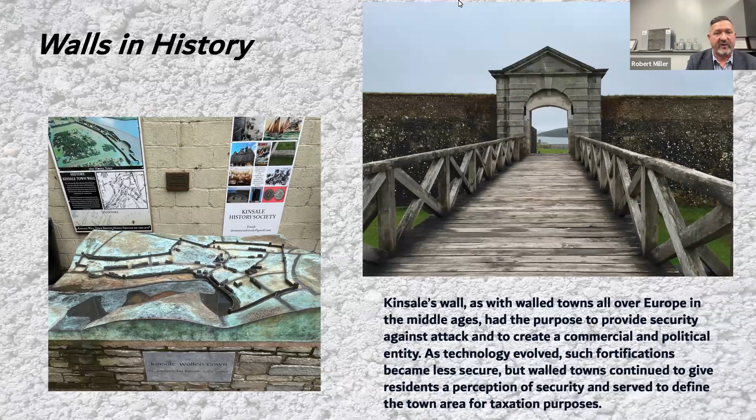Historically speaking, there are whole cities in Europe surrounded by walls. From a historical perspective, we use these products not only for the demarcation of that city, but as fortification, as protection, as all sorts of different things—demarcation of where you should start and stop as far as where the property is at. So walls are absolutely important when it comes to your project site.

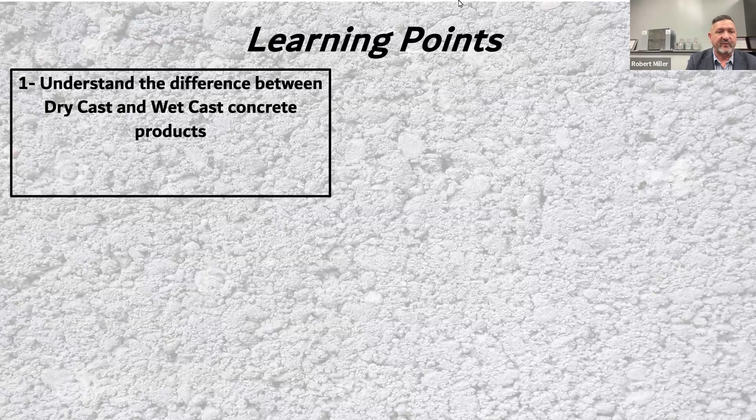Our learning points today: we're going to understand what walls are made of. Most concrete walls are either wet cast or dry cast systems. We'll discuss the differences, so you have an understanding. The particular wall that DURA-Crete manufactures is a dry cast product, and we'll go over the benefits, features, and what the product can do for you on your project site. Next, we'll talk about how a wall serves various layers of security on your project site.

Certainly the most obvious is it's a visual barrier. It's private, but it also has some sound attenuation, as well as resistance to climbing. It can serve higher levels of security, like ballistics or vehicle crash ratings on your project site, if necessary. So a wall, even though it's a single simple line demarking your perimeter, can serve a lot of different layers of your needs on those project sites.

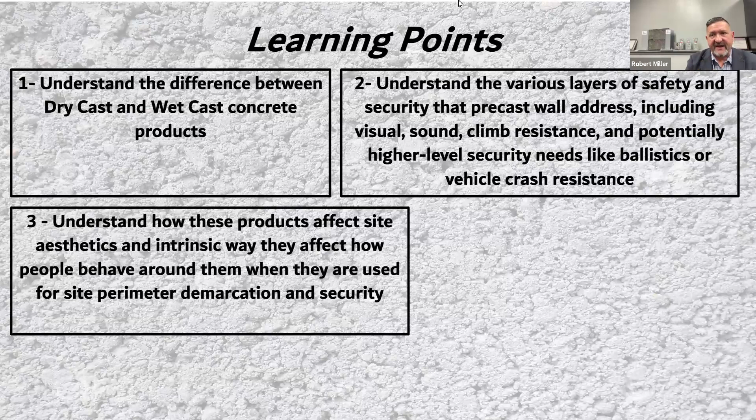Next, we're going to talk about how these products are aesthetically valuable to you—how they intrinsically help make the site look a little bit nicer, perhaps, but more importantly, how people are going to behave around them. A lot of study has been done with perimeter demarcation, and walls certainly fall into that category. We'll talk about some of the psychological effects of utilizing these products when you're putting them in place on your project site.

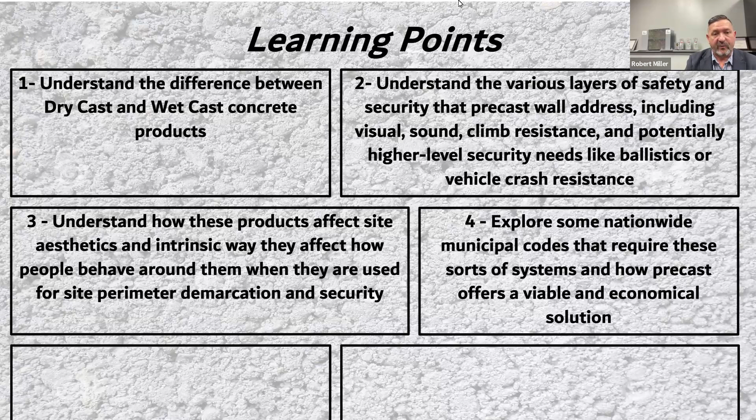And then finally, we're going to talk about some of the codes. More often than not, you'll find that these products are actually required for getting your C of O, for getting the permitting moving forward, especially if you're backing up to a residential area—putting in a commercial property that's backing up to a residential facility. You've got to make sure you have that demarcation in place, and these walls are often specified or required as part of those codes. We're going to review some of the national codes available in today's marketplace.

But starting at the very beginning, we're going to understand the difference between wet cast and dry cast concrete products. When we talk about concrete and cement, we have the tendency to use them together, but please understand that cement and concrete are not the same. Cement would be equivalent to flour if you're making bread, and concrete would be the bread. Cement is only a portion of the chemistry we put together with water, aggregates, and other things to produce the concrete.

How we get to that end result involves a lot of different chemical solutions we could put together. Just like different kinds of bread are available, there are different kinds of concrete where I could change the water level, add more cement, add more Portland, put in more gravel, use different types of gravel, use pea stone—all sorts of different things that make that end result concrete different depending on how I put all of those items together into that recipe, if you will. So all concrete is a combination of those different items to produce the end result of that concrete product.

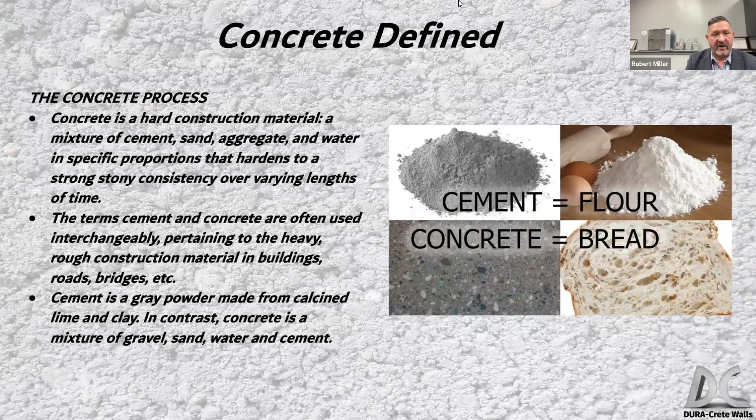When we talk about concrete, most of the time we think of it in terms of a wet cast system. Those of you who have ever done a driveway at your home, or put in a pad or whatnot, are familiar with wet cast concrete. That's when you take a pre-mixed solution of Portland cement, sand, and gravel, add water to it, it starts that chemical reaction, you mix it up, and it turns into a slurry, if you will.

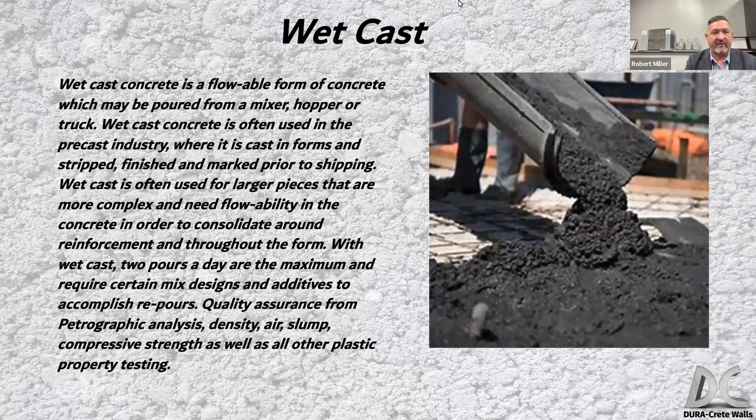You pour that slurry down, then you have to smooth it out, put it into forms, etc. Wet cast is certainly very popular for a lot of applications - building roadways, driveways, foundation systems, all sorts of things - because of its versatility. But in the wall world, it's a little bit more challenging.

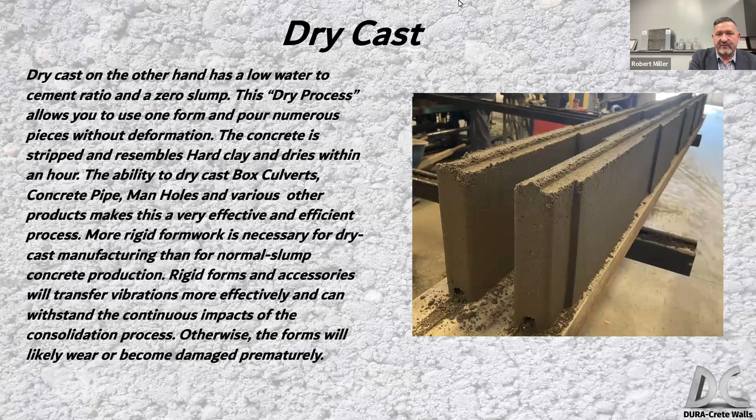If you've ever been to the beach as a young person, you've made a sandcastle. You know that if you put too much water in the bucket with the sand and dump it over, it's going to slurry right out of there. But if you put just the right amount of water in that bucket and turn it over, allowing the water to come out, and pull the bucket off, you have a nice form that is made. This is pretty much what's happening with a dry cast system, but instead of the bucket, we're using a form, and vibratory compaction to get all the bubbles out of it. Now I have the ability to produce a plank of a dry cast wall system that I could utilize on my project sites for a lot of different needs.

The key benefits of dry casting: first and foremost, better production. I am able to produce this at a very high rate of speed as far as a manufacturing process, producing those planks one after another, very consistently. That brings us to the second point, which is zero slump.

When we pull that form off of there, you're familiar with concrete, how it flows into those areas with a lot of moisture inside. Because it's dry cast, there is zero slump. So when that mold is stripped, it maintains its shape pretty much 100%, which is where the term zero slump comes from.

Once we get that done, it's now going into the oven to be cured. Through that curing process, we have minimal shrinkage. As we're producing this in the factory, I am pretty well assured that every single slat that comes off that manufacturing facility is going to be consistently manufactured. It has very little tolerance from one slat to the other when it's all finished and put onto your project site. So that minimal shrinkage allows us to manufacture very quickly, but also have a very consistent product when it's actually installed onto the project site.

Next, we have no air entrainment. Because of that vibratory compaction, any bubbles that might be inside the product are removed - they're compacted right out of it. One of the biggest challenges with poured-in-place walls especially is you have large masses of bubbles that might occur, and that will cause early degradation when it's exposed to the elements, water gets in there, et cetera. So with no air entrainment, it's a much more dense mix that allows us a very solid product when it's all said and done.

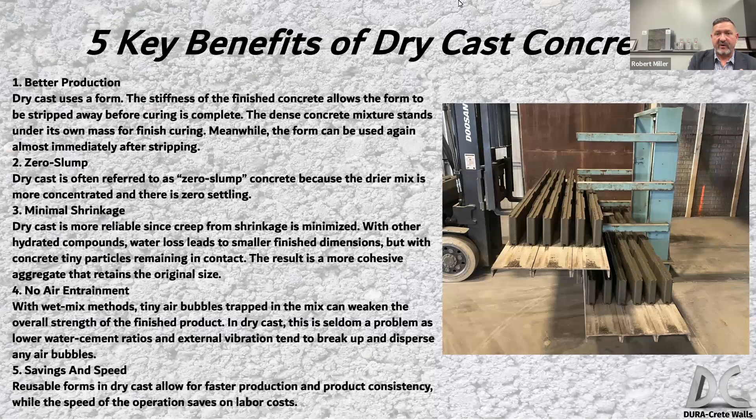And most importantly, savings and speed. We can produce this very, very quickly, so the product can come off the line without affecting your project site so much, which brings us to the last benefit: your construction footprint.

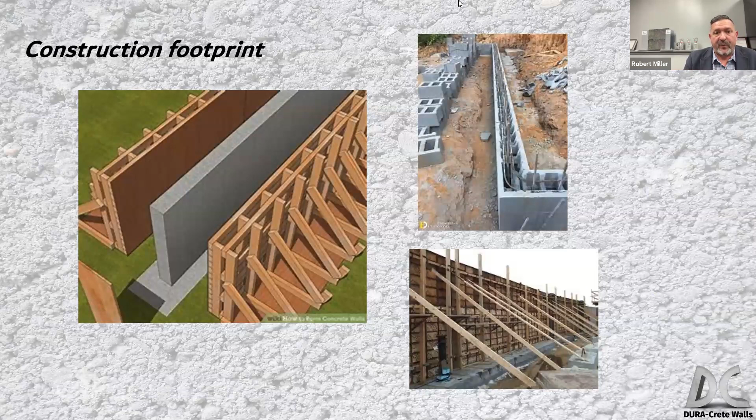Traditional walls - when you're putting in a poured-in-place concrete wall at the back of your facility - require a significant amount of formwork and shoring and all sorts of things that have to happen with the foundation that needs to be poured. It is quite a massive footprint on your project site. Even if you're doing block wall, you have to dig out that foundation, put the foundation in place - it's a continuous foundation - then put the block in place, and it becomes a pretty big task, and more importantly, pretty invasive on your project site.

So that gives you some idea of the values of why we would go with the precast system. The other value not listed here is replaceability. If you put in place a cast-in-place wall and somebody hits it, which inevitably will probably happen, with the precast system all I have to do is go to the manufacturing facility, make a few more planks, take your broken planks out, and put new ones in. At worst case scenario, you may have to pull and replace one of the posts that got struck, which again is a lesser impact on your site as opposed to taking down a whole section of brick, block, or poured-in-place wall and remanufacturing it on site, which is extremely impacting. So there's a lot of value in precast, especially for site demarcation walls.

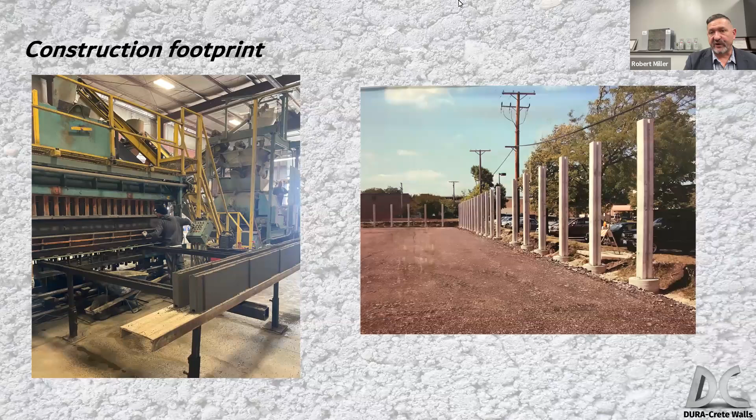One of the things DURA-Crete is doing as well, moving forward to make it more versatile and easier to repair, is having modular post installations with a textured steel post instead of a concrete post. So even if the post does get hit, now it's just a matter of pulling up 4 bolts rather than pulling up a whole foundation. So they're really on the progressive end of developing the product to be as user-friendly as possible.

Does that answer your question? Yes sir, absolutely. Moving on.

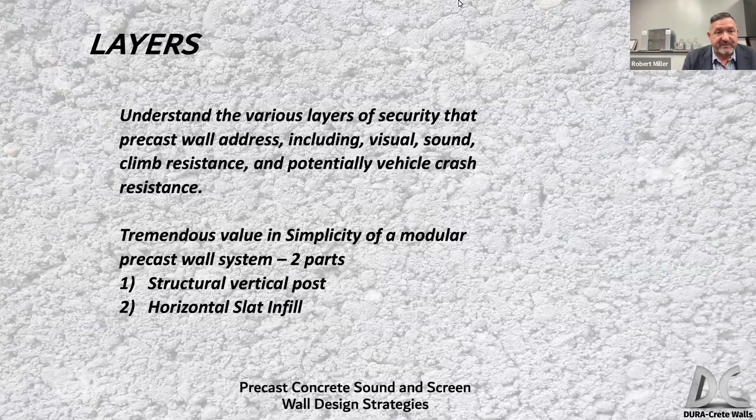The layers of security - when we think of a wall, from a basic perspective, it's supposed to be a visual barrier, that's why we're putting it in place. I don't want to see on the other side, so we're putting in this visual barrier. But it also serves a lot of other layers of security with this very simple system. When you look at it, it's really just a post and a slat, but it could actually do a lot more than just be a sightline demarcation. Again, on the most basic form, it's a visual barrier - I'm putting this product in place because I don't want you to see what's on the other side.

They have contracts right now with a lot of distribution centers. The distribution center does not want you to see the activities of their trucks inside their facility. So they're putting up a screen wall in part because of the visual barrier qualities it provides on my project site. It keeps it visual security, if you will.

The other is sound barriers, noise mitigation. These products are used often between residential neighborhoods and roadways. Those of you in the Fort Wayne area on this call know exactly where that site is at. I believe it's Illinois and Coliseum, don't quote me on that, but you've driven by it if you live in Fort Wayne. You know where that wall is at, and that wall's intention is to be a noise mitigation barrier.

When we talk about noise mitigation when it comes to walls, there are two different aspects. There's absorption, where the wall actually absorbs the sound waves and deadens them so they don't pass through the wall in a certain fashion. And then there's reflective sound waves, where the wall will reflect some of those waves back or deaden them as the diffraction angle occurs, depending on the height of the wall, so the person on the other side can't hear it.

When we're talking about noise mitigation and sound barriers, I give a whole presentation just on this topic to give you some perspective of how it works. If I put up a wall that has a 40 decibel level of noise mitigation, what that means is if I have a noise that's 80 decibels, it's going to deaden it by 40 decibels, which to the average person is like a quiet conversation, somebody talking where you can barely hear them.

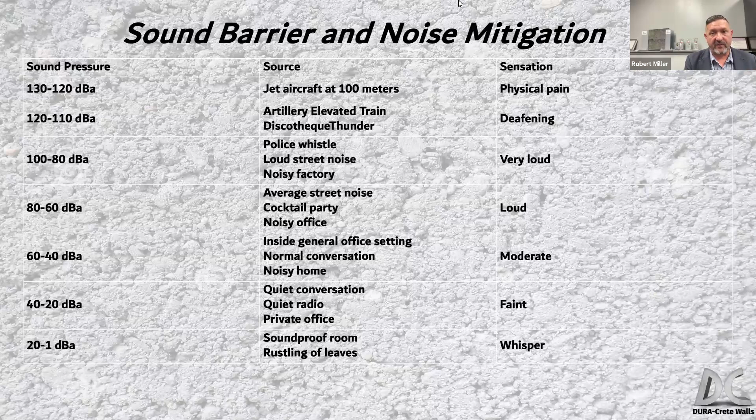Next, again, inherently, concrete is ballistics rated. If you shoot it with a projectile, it will stop that bullet. When we talk about ballistics ratings, it's a topic today that we don't like to talk about necessarily, because we're thinking about ballistics now at schools and offices and places we never thought we'd have to worry about ballistics. There's a lot of different ballistics ratings out there. Most of them are going to be about glazing perhaps, or about body armor, and you don't want to confuse them.

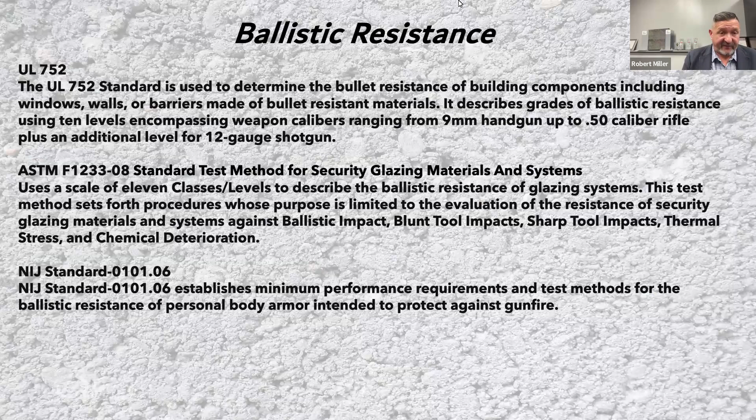When we're talking about building components, the ballistics rating you want to be cognizant of and aware of is UL 752. That is my favorite ballistics rating because it is the most cut and dry one. When we talk about body armor and things like that, there's a lot of variables involved with distance and caliber and whatnot. With ballistics ratings here, it's pretty black and white when it comes to a product.

We're basically going to say that based on a certain caliber of projectile at a certain velocity, at a certain distance, with a certain number of shots, it will yes or no stop the projectile, which is where you get the rating from. If you are working on a project that needs a ballistics rated wall, we need to have a conversation. The wall inherently has a level 1 rating just based on the fact that it's a 3-inch piece of concrete. But if you need something certified, in writing, with an engineer involved, we need to have a conversation if you're looking for ballistics rated systems.

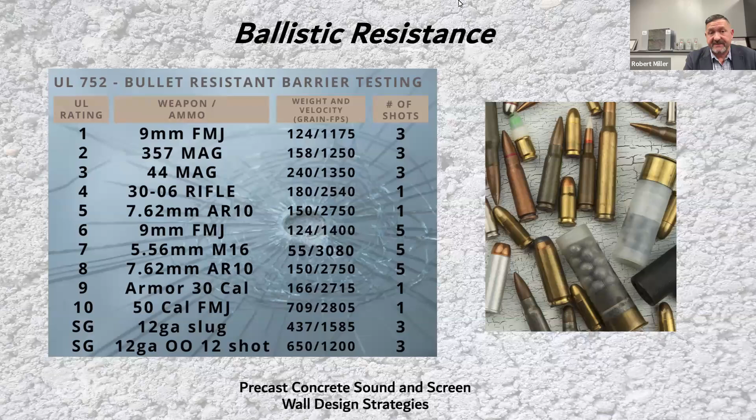And now we get to breach resistance. This is actually very personal to me. I serve on the SIA committee for perimeter security terminology.

I also serve on the ASTM committee for the F14 force entry resistance for fencing, gates, barriers, walls, all this good stuff. This is a hard measure when it comes to a product, but inherently a wall system is breach resistant. It is very hard to climb over, very hard to get through. You're not taking a simple saw and drilling a hole through this and cutting a hole you could get over very easily. So from a security standpoint, walls are inherently breach resistant.

Speaking as a guy who serves the industry as one of the testing agents for the ASTM and SIA requirements, you must have a conversation if you're looking for certified breach resistance.

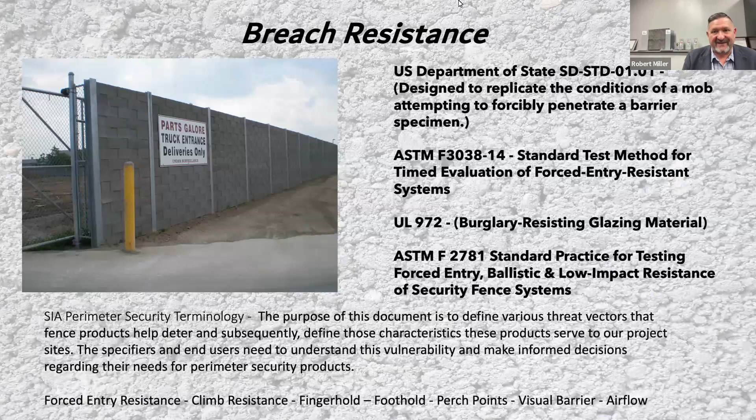And I'm going to say this one more time when I get to the next level of security, and that is vehicle crash resistance. Here again, we have a lot of global standards. There might be a requirement based on the facility and where you're putting this wall that it actually has some level of crash resistance. Just because it's a piece of concrete, it's going to have a bit of resistance, especially with a steel post 10 foot on center. If you crash your car into it, it's probably going to do a pretty good job of stopping that vehicle from getting too far past the wall. But if you're looking for certified resistance, a conversation must be had to make sure it's going to do the job you want it to do.

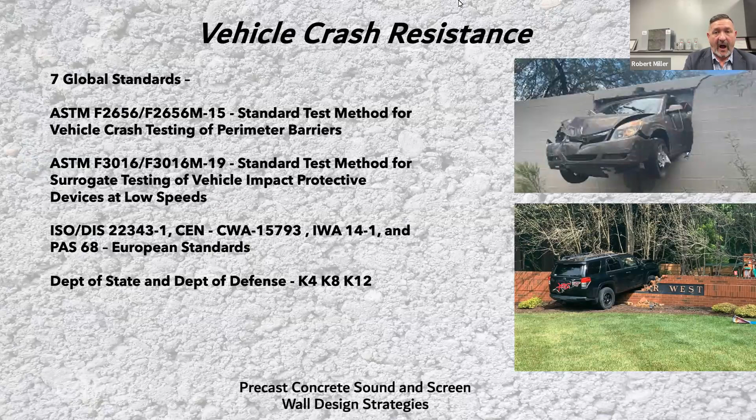And inherently, walls have a lot of other features. They don't burn very easily, so if you're looking for fire-rated systems and you have an enclosure perhaps outside of a school or a hospital that needs to not have any sort of combustible products, concrete does not burn. It's also a good shelter from wind, sun, and elements. It provides shade naturally, so if you want to protect some equipment on the other side of the wall, it's going to provide shade and keep the sun from beating down on it.

And then don't forget, even though the wall is important, you do have to have access, whether it's fire plug access, pedestrian access, vehicle access, etc. You want to make sure you have those access points in place. One of the values DURA-Crete brings to the table is they have a full manufacturing facility that will do the access gates and access points as well, either moving or manual type systems.

And then finally, don't forget these products also serve as a platform for other technologies. Oftentimes when dealing with a wall as a perimeter demarcation device, you want to also have cameras, or lighting, or other things. Inherently, the wall is a platform for those items as well. It's a great place to mount your cameras, a great place to put some lighting. And if you work with them as a manufacturer, you have an opportunity now to use that single line as a platform for a lot of different layers of security on your project site.

Quick question on that, Robert.

With regards to using the walls for lights, cameras, things you want to mount on, I know aesthetically sometimes clients are averse to having a whole bunch of surface mounted conduits and raceways and things of that nature. Are these walls, or is the configuration, available with like a hollow core you could use as a chase for conduit like they do with masonry block on schools and things of that nature? No, there is no hollow core.

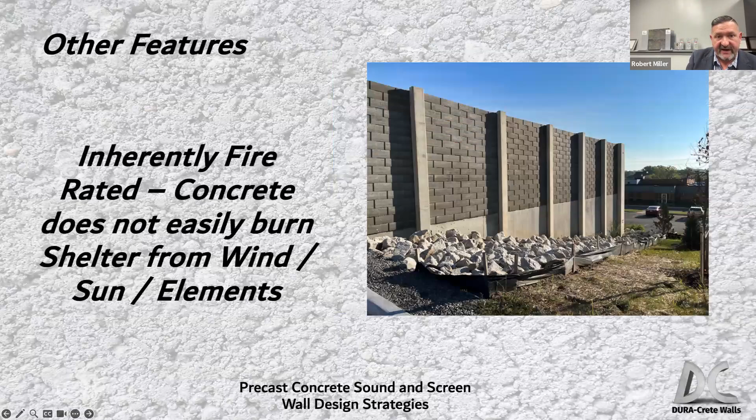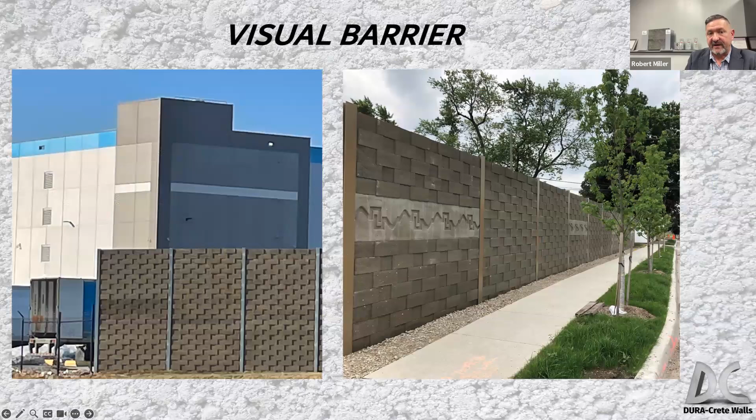Like in the fashion of this particular slide, on the right-hand side that ornamental insert is actually a wet cast ornamental insert. Instead of that, we would have a metal insert that would become the raceway now for those other systems.

Again, these are where conversations need to be had, I'll say that over and over. Make sure we understand that if we're putting in a raceway for a higher voltage product, the rating of the conduit it's within is correct for that site. Let's make sure we're having the right conversations at the right times.

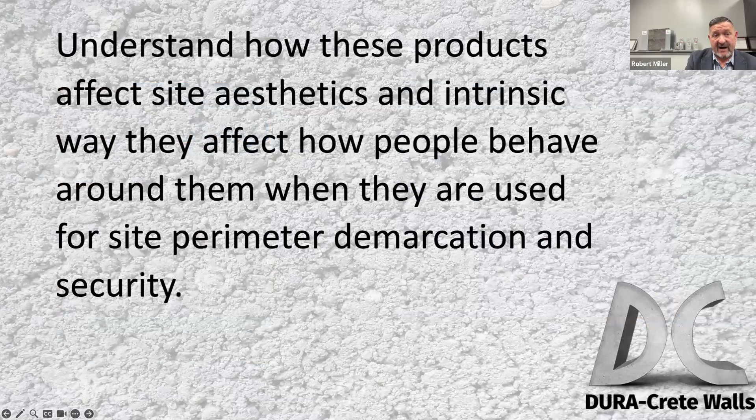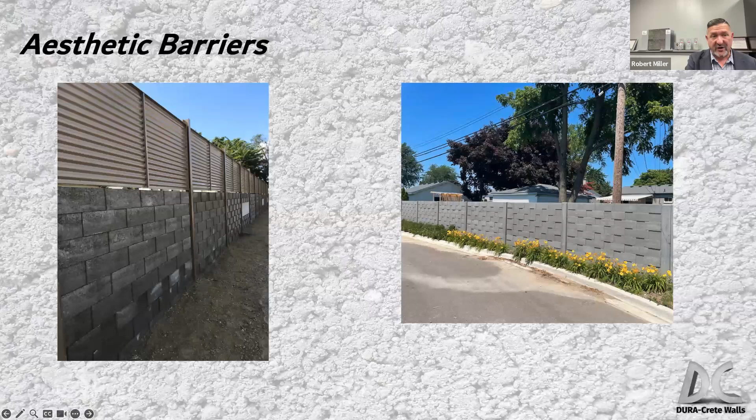Which brings us now to this portion of the presentation: site aesthetics and how they complement, but more importantly, how they affect behavior. Aesthetically, walls can be beautiful. They are important, they are there, we have to have them sometimes, but this is a great opportunity to work with your landscape architect and civil engineer to make these products not only functional, but aesthetically part of the facility.

Now it's a complementary landscape feature that is also very functional on my project site. This wall you see is a beautiful gray looking wall, precast slat, with a red strip. What you don't see, because the picture couldn't capture it, is the building has red striping and other features that complement it, so now that simple wall is part of the facility and complements it.

Working with the landscape architect, we have some plantings there to keep people away from trying to climb it and peek over. It has planter boxes, and that picture was taken more in late fall, but they put flowers in there in summer. So it can be a complementary feature for your site, not just a wall anymore.

And if you really want to get crazy, you can start adding texture and color and all sorts of different things. It takes the stains very nicely.

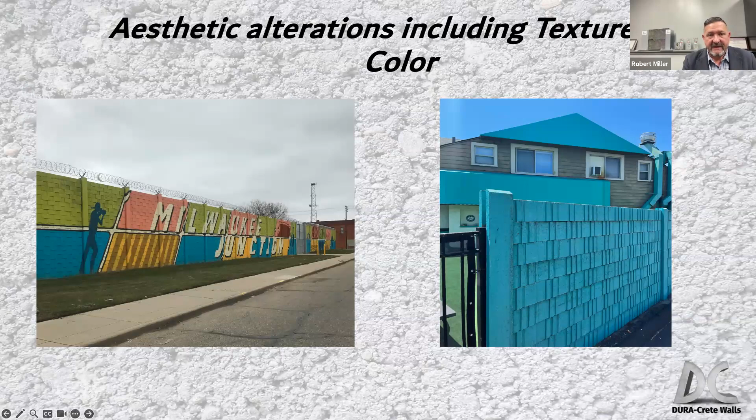And again, if you want to start running conduits, things like that, they can make that part of the wall - the full 8 inches, maybe 12 inches high, or make it super thin so it's only a raceway. It's only something at the bottom slat, or the second from the bottom, or maybe the top slat that frames it in and becomes part of that raceway for external technologies you're putting in place.

And certainly the other value is it's a modular enclosure system, primarily used for dumpster enclosures, mechanical enclosures, things like that. This gives you a really good versatile option, especially for school districts. I've talked to a lot of schools over the years, and one challenge they have is things change - administrations change, coaching changes, their football team gets better or worse, they move things around. If I have the ability to start moving things on my site and maintain ownership of it, it gives me more versatility.

So if I could take this enclosure, pick it up because it is completely modular, and move it to the other side of my facility because things changed, I could do that. So if this is where we're storing our marching band's equipment or the football equipment, and this year the marching band says they got a lot of funds and they're growing, so we're going to expand this.

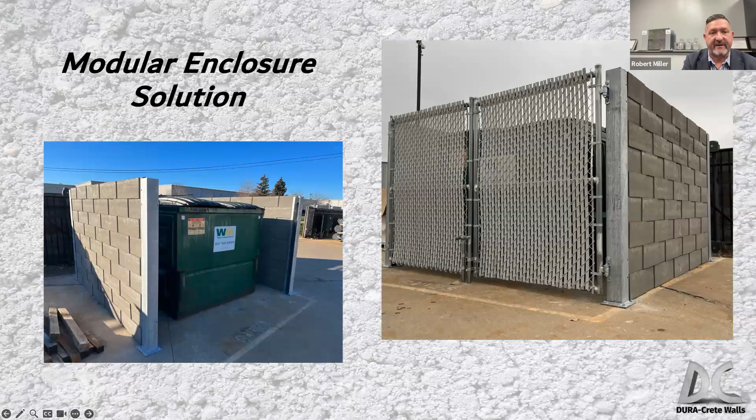It's easy to expand and add to that enclosure. On a basic level, these enclosures could also be used for dumpsters, grease traps, mechanical, et cetera, giving you versatility of placement on your project site. We'll talk about their actual product a little later and how this can help support your efforts when you're designing these systems. Moving along though, CPTED.

I'm actually a CPTED practitioner myself. A lot of what I do when working with an architect or engineer is we talk about CPTED first, and that is crime prevention through environmental design. That is doing things on purpose, not just for a purpose. It's very purposefully putting the wall at a certain point, at a certain place, because it's going to do something and affect how people behave.

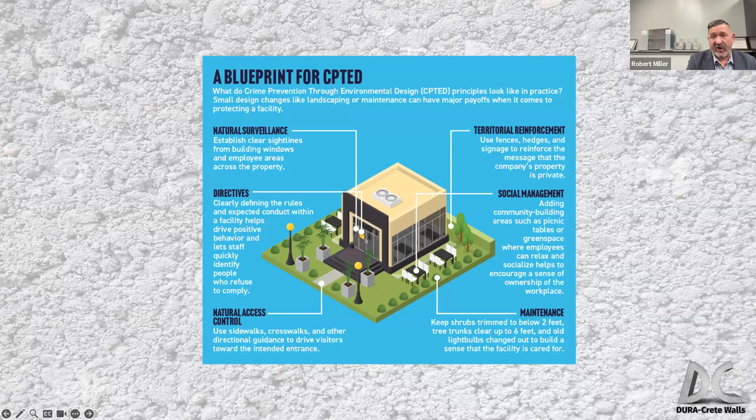These products can be very, very powerful on our project sites. Those of you who have seen my presentation before, I talk about privacy, and how powerful privacy can be. One of the examples I use is a study done in the New York Times back in 2005 that talked about the Berlin Wall, one of the most famous walls in history.

We all know the history, you all know the story. But what's interesting is in 2005, when they interviewed some of the people who were present when the wall came down. And you have to remember history - when the wall came down in 1988, 1989, whatever it was, the people who were there with the sledgehammers were young people, born after the wall went up.

They had no idea what was on the other side. So they created a fantasy world on the other side of this wall that they thought existed. And when the wall came down, they went through the hole and looked around and said, wait a minute, it's not what I thought. I thought there was a building over here. I thought there was a store off in the distance, and it wasn't present.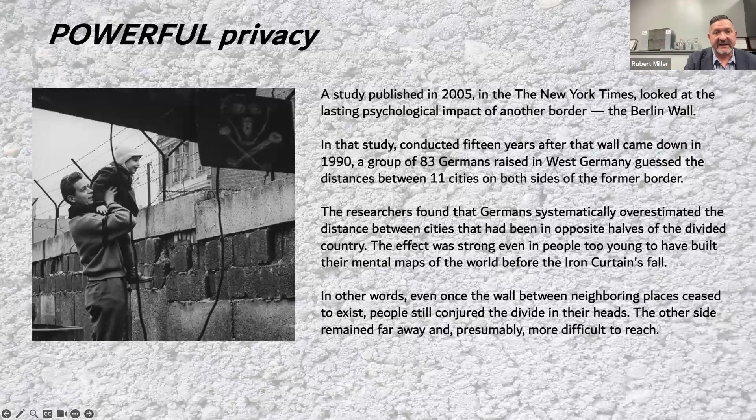Now, what's crazy about this article and what I got out of it personally was in 2005, when they interviewed those same people, the fantasy world they created in their mind still existed, even though they saw reality. That is how powerful privacy can be. So when you're looking at the private function of these products, keep that in mind.

Next, we're going to talk about the security factor and how it makes people feel secure. A great study done in 2006 by ASLA - some of you in the audience are probably members of ASLA - talked about the psychological and physical influence that a perimeter product can have, whether it's a wall, a fence, or whatnot. And they talked about preschool children.

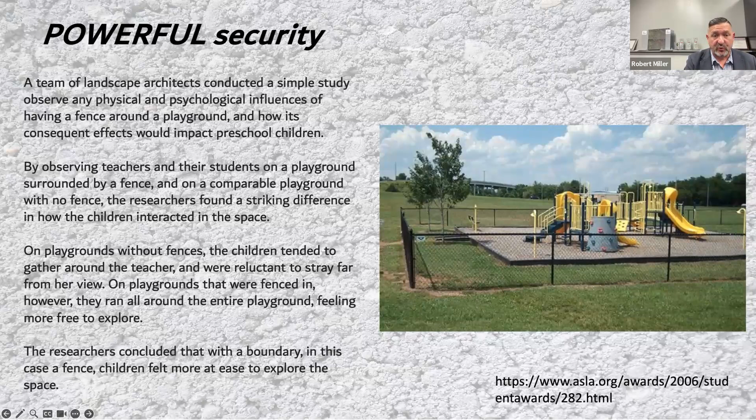Essentially what it said is when the kids were in an enclosed area, when the playground was enclosed, they behaved freer, they felt safer. They ventured away from the teacher, from the outside assistant, a little bit more when they knew where their boundary was at. When they took the fence down and there was no boundary, the kids were a little more scared and stayed closer to the teacher. So again, these products absolutely have a factor in how people behave around them. If you put this around a school, the kids are going to act differently knowing where their boundary is than if it's not in place.

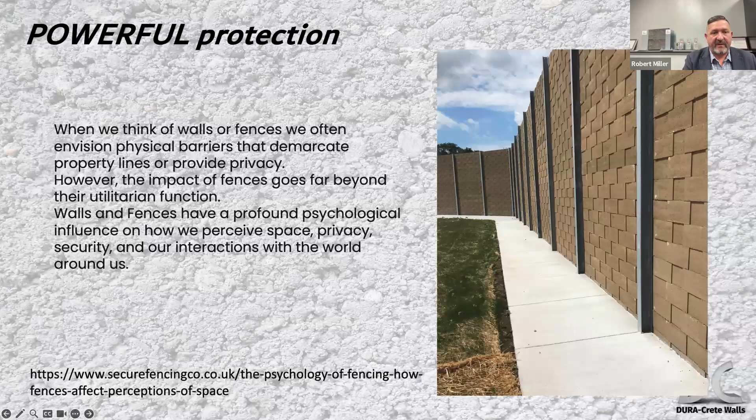Protection - a study in the UK talks about how these products intrinsically make people feel a certain way. If I put a fence around my facility and put signs all around that say danger, keep out, you know exactly where my line's at. You know what my intentions are by putting that tangible marker in place. You know that you're not supposed to get through that wall or on that wall.

On a societal level, if you were to put a wall between a residential facility and a commercial facility, and for some reason somebody made a mistake and moved that wall one foot into your property as a commercial owner, and that residential owner now has an extra foot of property in the back of their yard, do they not touch it? Do they not leave it? No, they absolutely don't.

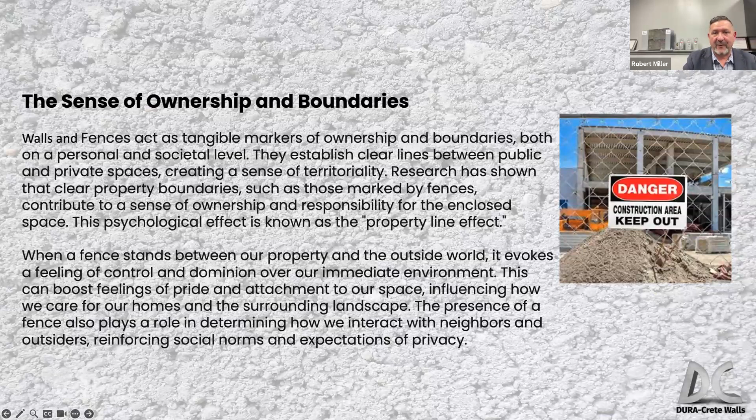They use it, they're going to start planting bushes there, and it becomes theirs because the boundary was moved. Even though on paper, if you go to city hall, it says the line is a foot back, that becomes their boundary because we moved the physical boundary a foot out. So it absolutely has an emotional role in how we deal with privacy and social interaction.

Those of you who have seen my other presentations know I talk about my neighbor. I've lived in my house for 15 years and I can't stand my neighbor. I didn't like him the day I moved in, I don't like him today, that's just the way it is. But we get along because I have a privacy fence, a private demarcation between our properties. I don't have to see him every day, he doesn't have to see me. We don't have to interact because that wall is in place between us.

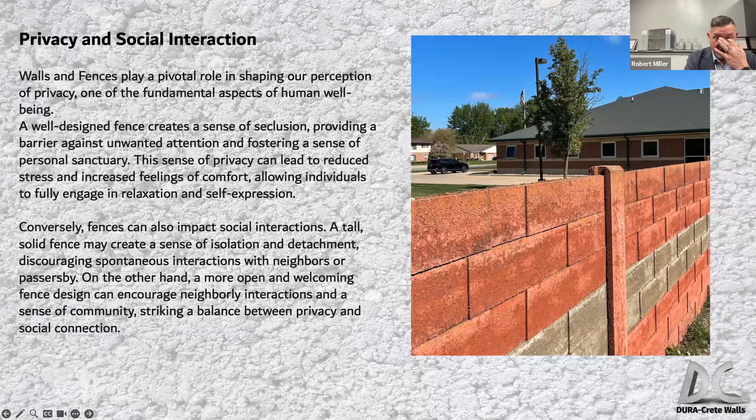It changes the way we behave. And most importantly, it provides peace of mind. If you're a distribution facility and you put a 20-foot high wall around your facility, even though you know somebody could get a 21-foot ladder and climb that wall, it makes you feel more comfortable knowing that demarcation is in place, and that you know how people are going to act when that wall is doing its job protecting and providing security for your facility.

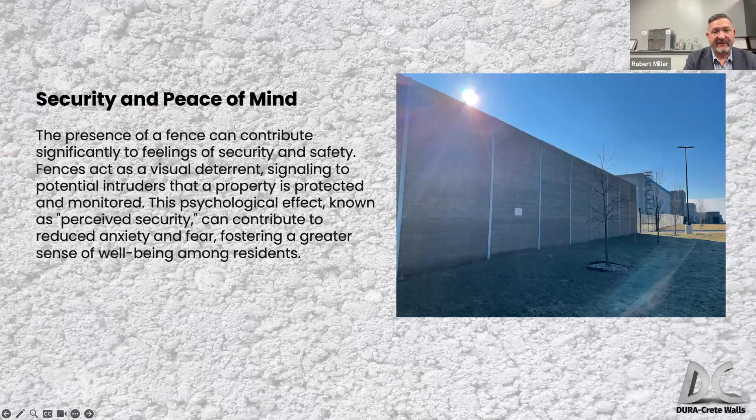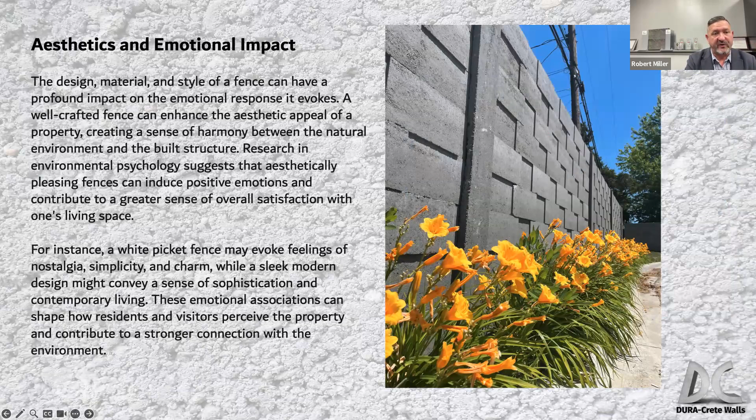And then certainly there's that aesthetic component, an emotional component. They can be made to be beautiful, they can be made part of my site. There could be signage, lighting, or other features, plantings. These products absolutely need to be worked with your landscape architecture because they're on that perimeter, and I can bolster and make it look so beautiful. It's not just a wall anymore, it's part of my environment that I'm working in.

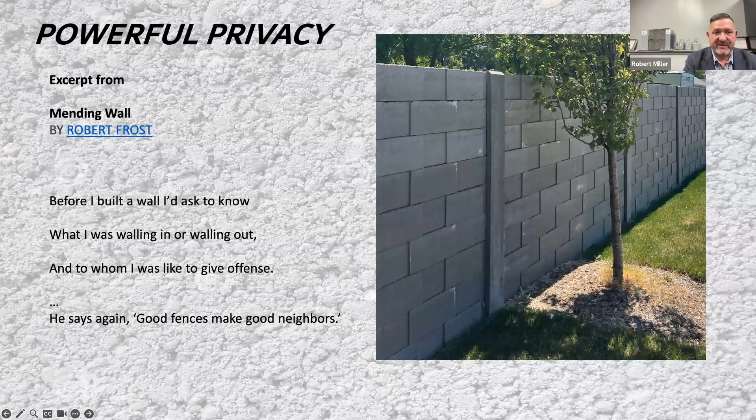As a lifelong fence person, one of the things I always hear is 'good fences make good neighbors,' which is a Robert Frost poem. I didn't realize until I started collaborating with Joe over here at DURA-Crete that the title of the poem is actually Mending Wall. I've said that probably 1,000 times in my 38-year career, never realizing the title of the poem. When we were talking about that, the realization that he was actually talking about a wall and not a fence was interesting. So it brings it to full culmination that historically these products are powerful, they do have an impact on our site. Even from an inspirational standpoint, Robert Frost made a statement that we use in our fence industry now pretty much every single day.

Moving along. No, we're moving along fine, Robert. Perfect, I'm right on time too. I abbreviated just the right amount of time here.

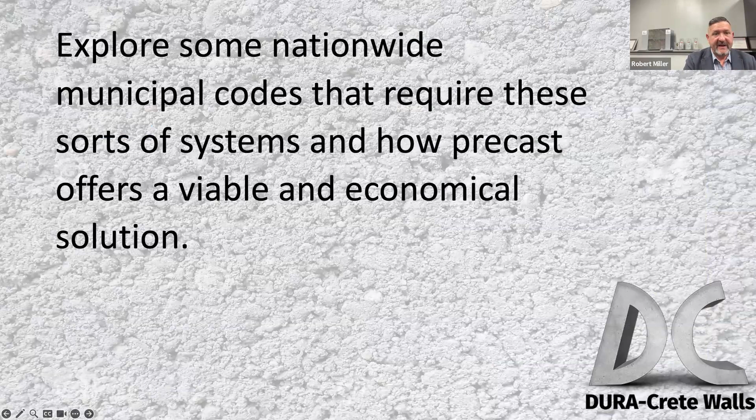Municipal codes that are available - oftentimes you're going to see that these products are required. Make sure you understand that if you need help, there's a full staff of people available to assist you in making sure the products that are present are going to meet those codes and requirements, whether it's a simple dumpster enclosure or a demarcation wall or whatever it might be. Every municipality has their own standard when it comes to what they want. So make sure you understand them.

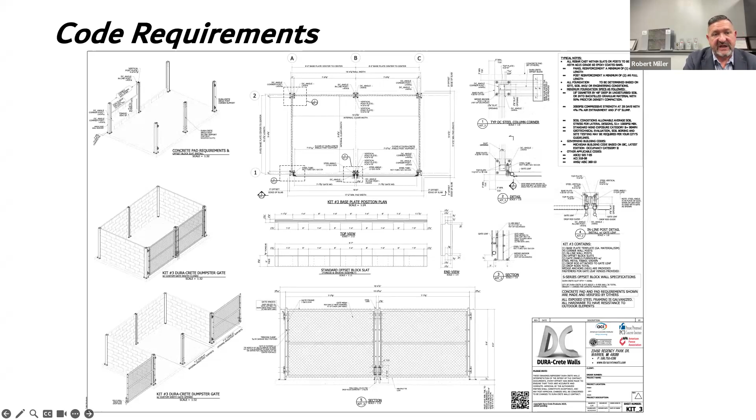Some of them are actually pretty fun. I get really involved with a lot of this when I'm doing design consultations and trying to find the right products that meet those requirements. Those requirements could be something as simple as a dumpster enclosure, where you're producing three sides and a gate to keep the dumpster from being exposed, from trash blowing around, mechanical enclosure requirements, et cetera.

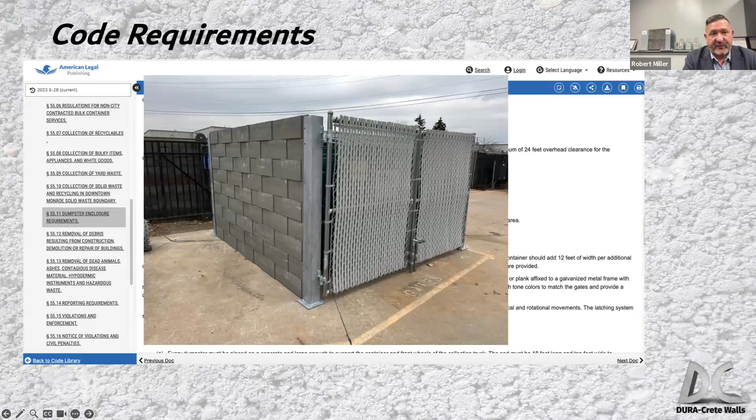Some requirements are present on a national level. This is from Monroe, North Carolina, where it's essentially calling for - a fully enclosed wall with a minimum height of 8 foot to block 100% of the view of the enclosed area. That's their code requirement. The rest comes into play with the gates, the hinges, et cetera. But essentially they're talking about a simple dumpster enclosure that this product meets 100%. Another standard here for a trash enclosure - this is Los Angeles, California, very similar.

It requires that it's a masonry wall, approximately 6 foot high with a solid roof. A little bit different—you have to have a roof on top of the enclosure in LA, which is a requirement to prevent rainwater from getting into the dumpster and leaching into the groundwater system. But essentially, it's the same sort of thing.

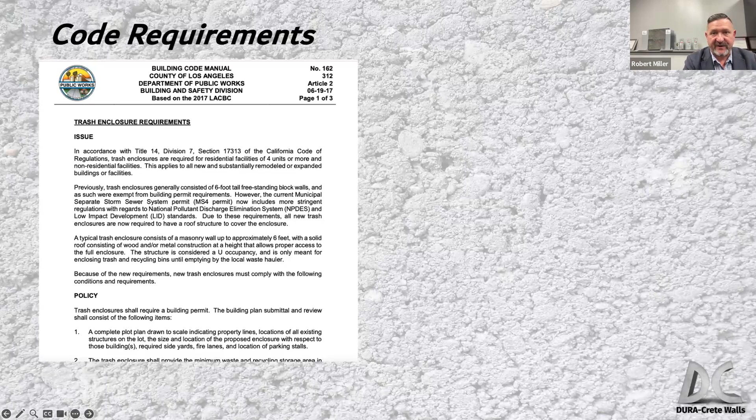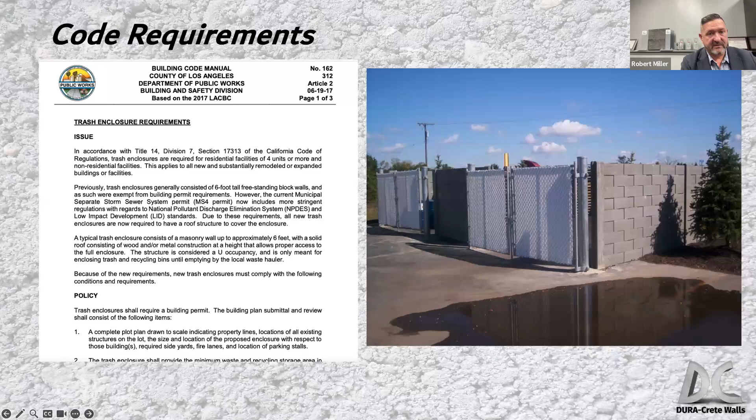Now, they're calling for masonry here only because they don't know that precast exists. And precast essentially is a masonry concrete unit, so it would absolutely fit those requirements. What you don't see in the photograph here is that cap that goes on there, because LA requires a slanted cap to have the rainwater run off of it.

This is the ordinance here for Eastpointe, Michigan, right down the street from where we're at. It requires all parking districts and service districts for offices, light industrial districts, any zoning areas to have a 6 foot wall in between them and the residential area.

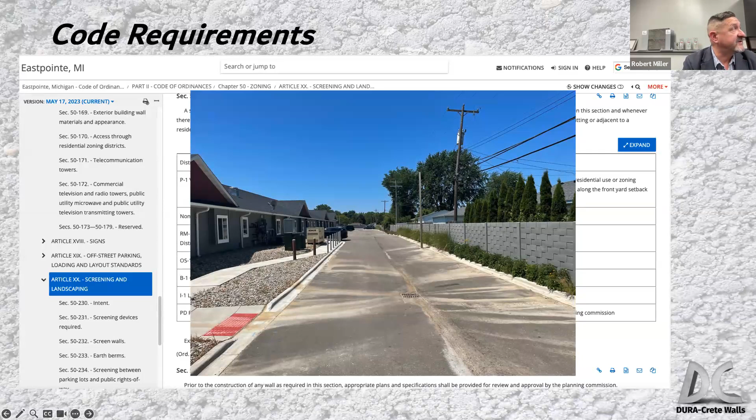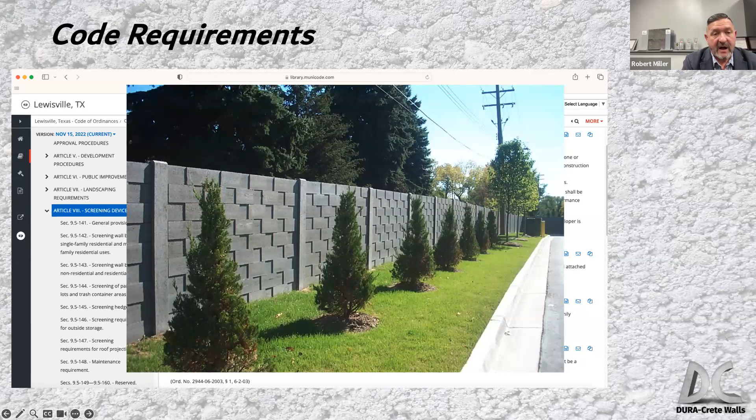And then we have Lewisville, Texas here—again, requirements for screen walls in between residential and non-residential areas, between single family and multifamily facilities, where again, you're just putting that product in place. Another opportunity to add plantings and beautification, meeting those code requirements as written by those different municipalities.

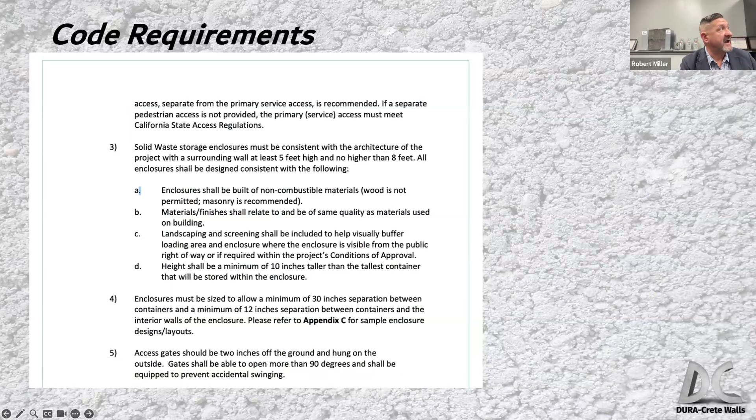Any questions? Yeah, I got a couple. Okay—back in the beginning, you were talking about the sound mitigation. Yes.

It may even involve an acoustical consultant, but is there product data available from DURA-Crete that shows what you were talking about, the sound reduction and the diagram of which way the sound goes based on the design? Yes, they have had their product tested at an independent lab, where they actually have the data of their standard 2.5-inch wall, of what reduction it has of decibels. It was done by an independent testing for the product.

If you have a specific need where we're changing heights and you want to make sure that it is meeting those requirements, talk to them, talk to their engineering department, because they'll make sure that they're flexible to get the right products in place for you. As we talked before, not only does the product absorb, but it deflects. So sometimes your deflection will be accomplished by going 2 foot higher, and that will help deaden the sound a little bit more. From a 6 foot wall to an 8 foot wall has more sound attenuation simply based on the height.

So if there's a specific need, have the conversation. If you're just looking for that data to say, hey, what does a 6 foot wall do, so you can tell the residents behind there, he has that data. They have tested the product 100%. Absolutely. Okay, is there any type of limitations as to the coatings that can go on the outside of the wall?

You baited me up for the next slide. Let me get this set here. And this is my 5-minute slideshow. Play from the start, which this is your 5-minute DURA-Crete wall commercial.

DURA-Crete wall is a small manufacturer based in Warren, Michigan. They've been producing this wall for well over 25 years. The previous owner, who happened to be Joe's dad, kind of let it be its own entity. It did its thing, it was small, he left it alone. Joe has decided to take it to another level. Part of that is the architectural outreach and understanding the language that you folks speak. So what he has done is hire a full-time staff of design professionals that understand the product and can help you make sure you're going to put it on the ground right. They'll help you not only with the product capabilities, any questions you have up front, but also the most important thing, the budget information. They're going to help make sure this is within budget and going to serve the needs of the site appropriately, so that it's not only aesthetically pleasing and functional and maybe has some sound attenuation, but do you know how much it's going to cost before it gets onto the site?

The 25 years that they did spend, they did a lot of the installations themselves. They have a whole installation division, which kind of brings me to their go-to-market strategy. It's hard for them to mobilize a crew to go down to Indianapolis to install a wall. They can do it if they want to, but they do have installation partners in markets like Indianapolis. I know there's a newer company called Safeguard Solutions. There is, what's her name's, up north out of Fishers. Bullseye Fence has installed their product. Capital City Fence has installed their product before. So they're willing to sell to them. They also will sell direct to your smaller construction managers, so if they don't want to hire a fence contractor, they're already doing those things on site. They're capable of putting in a pad and mounting these bolts to the floor. They'll sell it direct to that small manufacturer so they can put it in themselves if they need, or a small general contractor so they can put it in themselves if they need. So really good go-to-market strategy with their products overall.

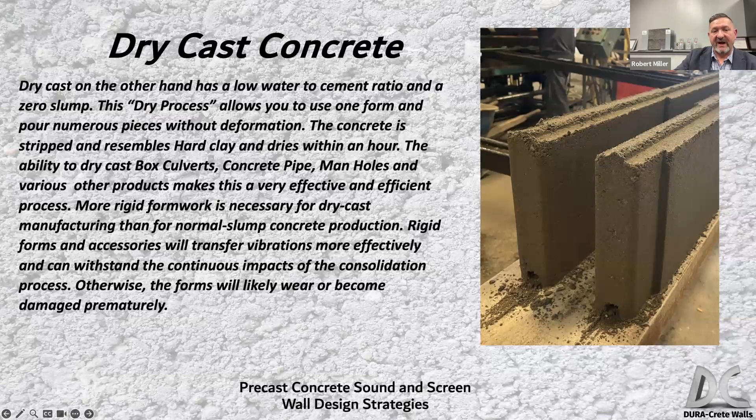Essentially what they produce is a dry cast slat. It is that simple. They produce a singular product that is very, very versatile. That is the product that comes off the line. We could change the textures a little bit, but essentially that's what you're getting. The rest comes from the fabrication end of their business, where they actually produce the gates, the posts, and all the little pieces that become the entire system.

When you're talking about a dumpster enclosure, one of the innovations that Joe came up with is a ready-to-ship, immediate install enclosure product, where as a designer you know these products come into play at the very end of the project. When everything else is done, they're already demobilized half the time, and oops, we forgot the dumpster enclosure. So what Joe came up with is a system where if you already have a concrete pad that's a minimum of 6 inches thick, or you plan on one, and keep the dumpster enclosure off until the very end, right before our C of O, you could have this entire system shipped on a pallet and installed in less than probably 4 or 5 hours.

Literally, as long as it takes you to drill 16 holes, mount those steel plates down, and put it in place, put the slats in. The slats kind of stack up. It's already pre-drilled and pre-ready for all the hinges and hardware for the gates and everything. The gates are already pre-manufactured. You're literally, I don't want to belittle it too much, but it's an IKEA assembly on your project site, where with a couple of drills and some impact wrenches, you'd have the product up. His timing right now is he anticipates 4 hours for a typical enclosure from arriving to the site to completion. That's if you're not experienced, might take you 6 or 8.

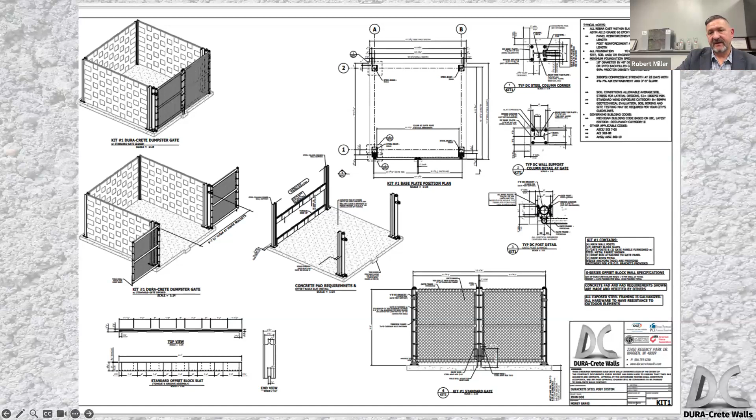That's up to you. Yeah. And I think we got one last one here.

Sure, resilience. It's kind of related to resilience and resistance. I showed a picture a couple slides ago where you had like a tree around a dumpster enclosure, or some of the landscaping up around the walls. Let's just say this is an unfinished wall - how resistant is it to things like tree sap, things that just exist in the everyday world? I know, like when trees get close to things, they tend to muck some stuff up.

Yep. Essentially, it's concrete, so it's going to be like anything - if it's sap and it's dripping on the wall, it's going to stick to it. So that's the sort of thing. If you actually put a graffiti resistant coating on there, it will help with tree sap. So if you have a lot of pines in the area and that's going to happen, put a graffiti resistant coating on there, and it'll help rinse that off a little bit better. Same with bird droppings, things like that.

The only thing I can tell you that is dangerous for any concrete system is glycol. If you have any sort of glycol that you're using for de-icing in any capacity, don't put this wall up, because it will degrade it. The glycols essentially what they're doing is they're absorbing the water out of it, and it makes it very, very brittle, and it'll fall apart. So if you're using glycols, that's the only thing I'd recommend against. Obviously they use it at airports a lot, but if you're using glycol on the facility and you know that they're going to de-ice in that area with glycols, don't put this wall, because it will eat at the bottom of that wall.

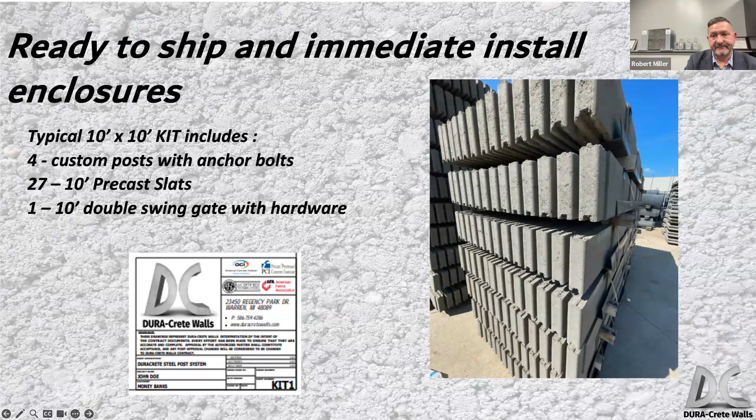All right. Well, Robert, Joe, thank you very much for this topic, this presentation. Very informative. Learned a few things I did not even know were possible with precast walls.